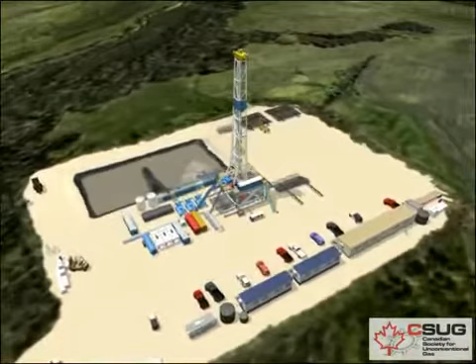To prevent contamination of the soil or water table during drilling, an earthen pit is dug and lined with a thick layer of plastic to hold rock cuttings and drilling mud.

Next, a pilot hole is dug at the precise location marked by the survey crew for the main hole. Two other holes, the mouse hole and the rat hole, are also dug in close proximity to the main hole to hold pieces of equipment and pipe during the drilling process.

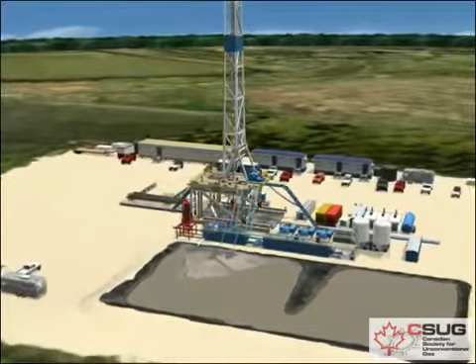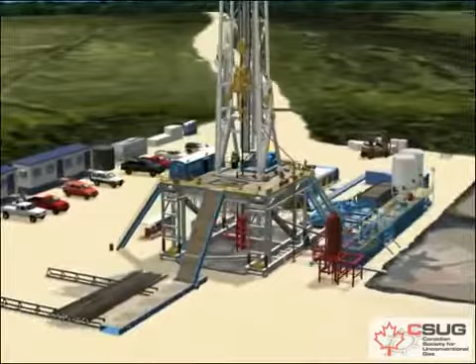It's then time to bring in the rig equipment to rig up. A rig that can drill a 10,000-foot well requires 50 to 75 people and 35 to 45 semi-trucks to move and assemble the rig, normally in about 3.5 days. The rig is then inspected to make sure it meets all specifications and safety standards.

Rig operations continue 24/7, typically ceasing only 1 day per year on Christmas. 2 shifts of complete crews are assigned to the drill site for the entire project.

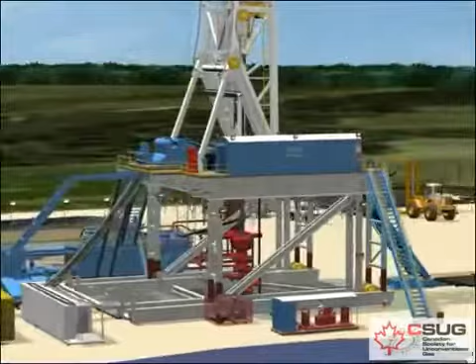Drilling happens in stages: drilling, running and cementing new casing, then drilling again until the bit reaches the depth of the targeted zone. A bit generally lasts for 4,500 to 6,500 feet of drilling. Replacing the bit requires removal of the entire string of drill pipe. Called tripping out, it is a process that can take several hours.

Before this is done, derrick hands mud up or circulate drilling fluid through the hole to cool the bit and keep the walls of the hole intact. To help keep cuttings from plugging the hole, this mud passes through shakers that separate the cuttings and send them to the pit. Additional mud system equipment, desanders, desilters, and degassers remove smaller particles and gas from the mud. The clean mud is then recirculated back down into the hole.

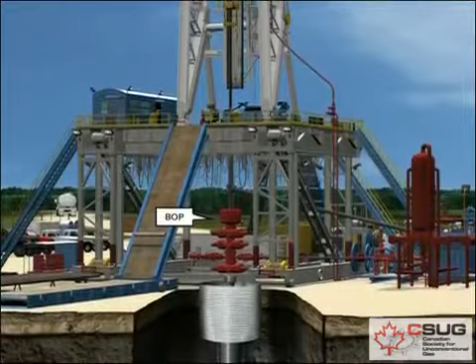The blowout preventer, or BOP, is installed on top of the casing head before drilling commences. It contains high-pressure safety valves designed to seal the well hole and block the escape of underground gases or fluids in order to prevent a blowout from occurring.

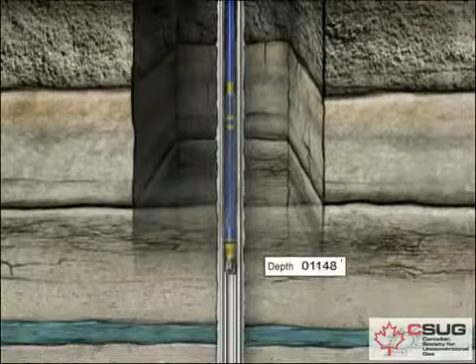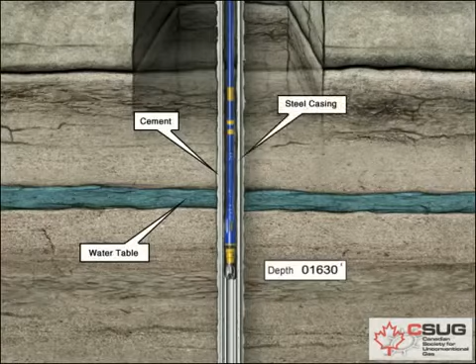Drilling begins with a hole of a designated surface depth, usually about 50 to 100 feet below the water table. Special care is taken to prevent contamination of the groundwater by isolating the water table from the well with cement and steel casing. The bit is the cutting element used in rotary drilling. As the bit turns, it crushes the rock efficiently, then shoots fluid out to loosen and carry these rock chips up to the surface. New sections of pipe are added to the drilling string as the bit drills deeper.

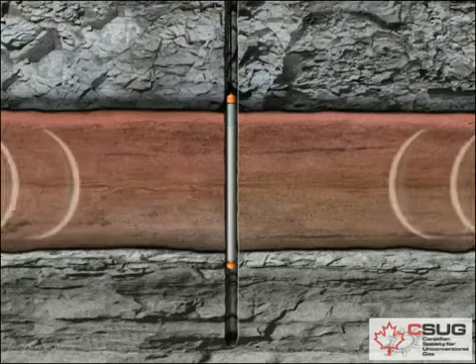When the hole reaches a designated depth, the derrick hands circulate fluid through the hole to condition it for logging, the process of measuring and recording the characteristics of the well. The logging information lets the oil company determine if the well indeed can produce oil or gas. At this point, the company will decide whether the well is to be completed or plugged and abandoned.

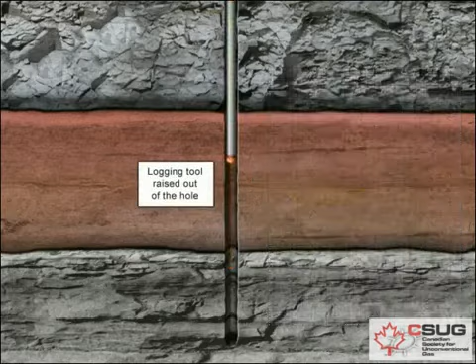If the well is designated as a producer, the crew inserts the pipe back into the hole to ensure that the hole is still intact and circulates mud through it again to test the casing. If everything tests positively, they remove the drill pipe and rack it. At this point, the crew inserts the last string of production casing that runs the entire length of the hole and cements the casing in the hole.

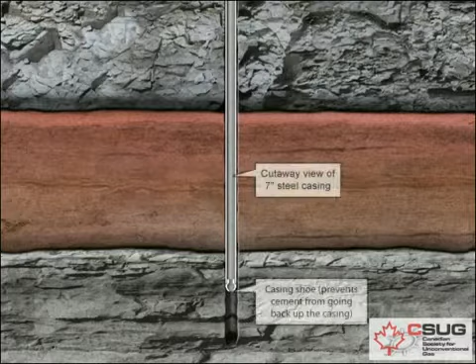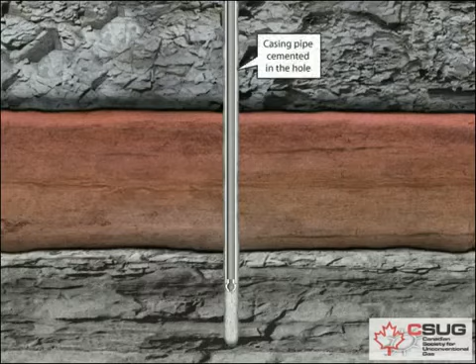The production crew then brings in the workover unit and rigs it up to prepare the hole for production. The crew runs small diameter tubing into the hole as a conduit for oil or gas to flow up the well. Next, the workover unit trips out of the hole and picks up a perforating gun, which the crew lowers into the well to production depth using a thin metal cable called a wire line.

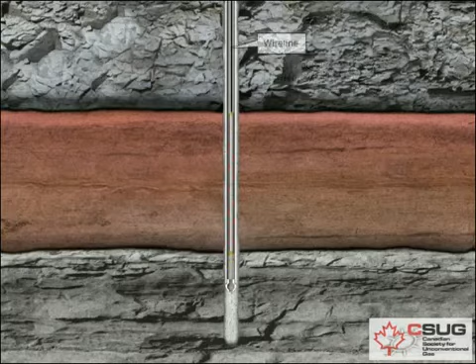An electrical signal is sent down the wire line, firing the gun and igniting explosive charges. These charges create holes through the cement, casing, and formation, connecting the wellbore to the reservoir.

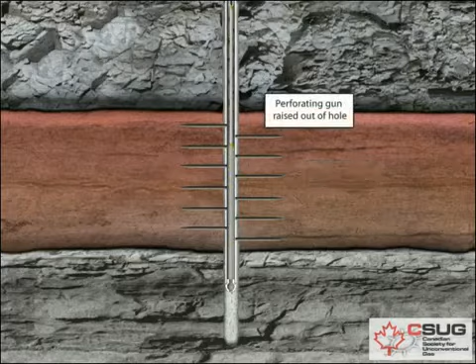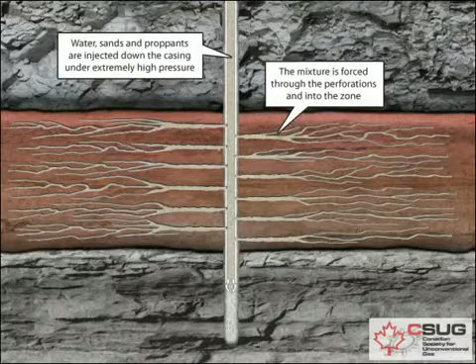To stimulate the flow of hydrocarbons, sometimes it is necessary to frack the well. This involves pumping water, sand, and fluids under extreme pressure down the production tubing and out through the perforations. The process fractures or forces cracks into the formation. The remaining particles will hold the cracks open, releasing the oil or gas. Monitoring the flow enables the crew to determine the best location for the choke, the device that controls the flow of the oil or gas.

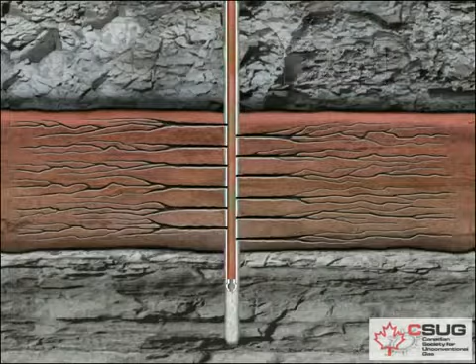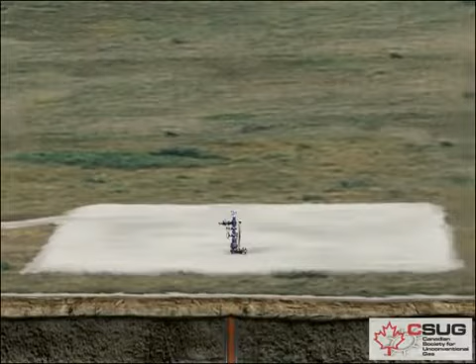Hydrocarbons were created from organically rich deposits subjected to tremendous heat and pressure. This same pressure has kept the hydrocarbons locked in the formation for millions of years. Once the pressure is released, the hydrocarbons are allowed to escape through the fractured zone and flow into the wellbore. The oil and gas can now travel up the casing string. The wellbore is isolated from the surrounding formations with casing and cement, preventing any contamination.

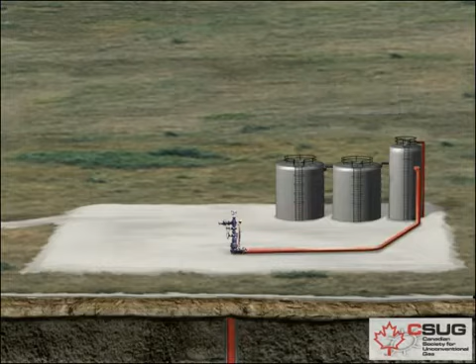The final step is to install a pump jack or production wellhead called a Christmas tree on the well. It is then time to produce the well and plan for any future field development.